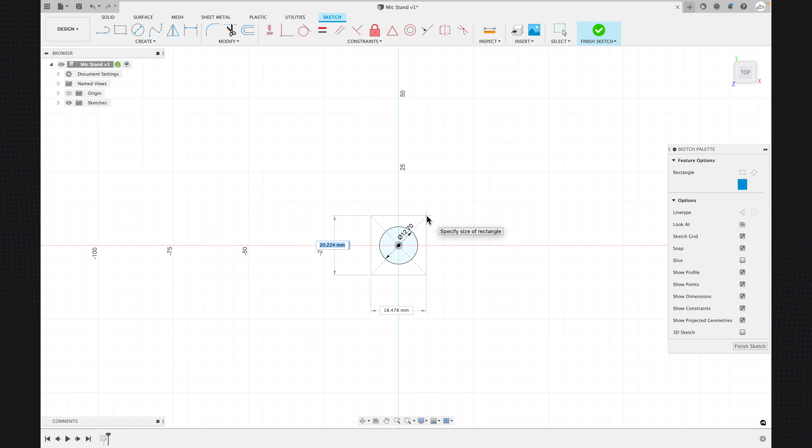So then I brought all the measurements into Fusion. I originally put the true measurements in, and then I did an additional sketch around those measurements to accommodate for tolerances so that everything would fit okay with 3D printing.

Then I added the slot portion so that you could slide the microphone into position. You might notice that I go back into the sketches a few times to make adjustments. That's just my way of going through different variations.

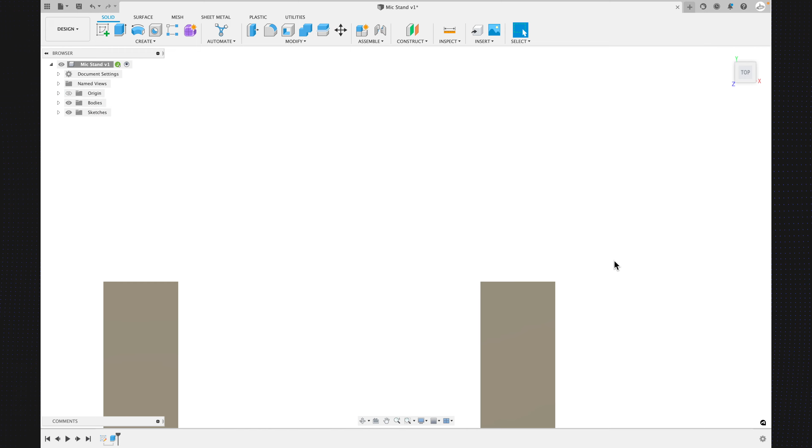I don't do much hand sketching. I think that Fusion does a lot better job of drawing perfect circles than I can. So that's just my process.

Then I do an extrusion here from an offset to make the slot. I made the slot about 2 millimeters so that the microphone would fit pretty easily, and then I could just tighten it down with that threaded part. And this is what the slot looked like when I got done with it.

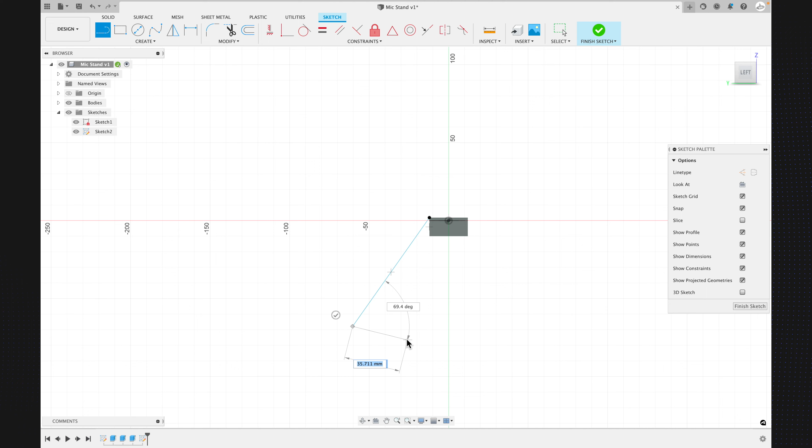So this is where I started working on the legs. I didn't do any measurements for these. I just tried to make it proportional the best I could and felt like this would be decent size since it is a pretty small microphone.

I actually started the profile sketch on the wrong plane, so I had to redefine the plane to make it in the right position. Then I used the mirror command for the other leg. Anytime you have a symmetrical part, I recommend using the mirror command because it saves you a ton of time modeling.

So this is the final model. I wasn't sure if it would work initially, but I thought it was at a point where I could print it off and test it out.

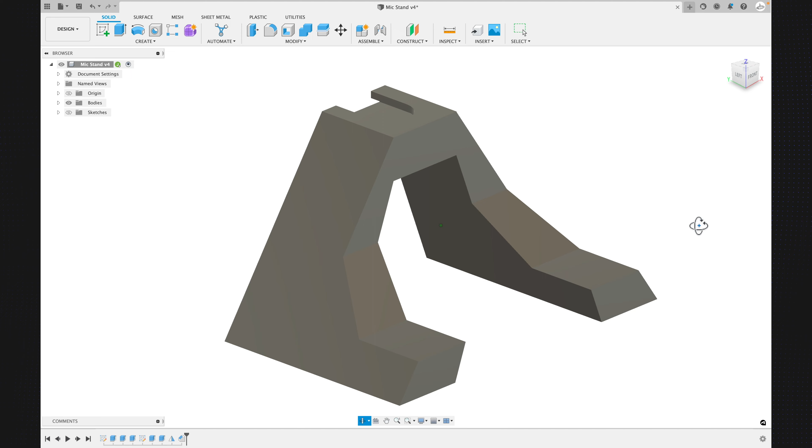I wanted to be able to print this without support, so I made the back of the mount flat so that I could lay it against the print bed. I think this is where some people make mistakes when designing for 3D printing. In my opinion, it's better to have a more simplistic design that prints well than to have a more complicated design that's harder to print or that requires supports.

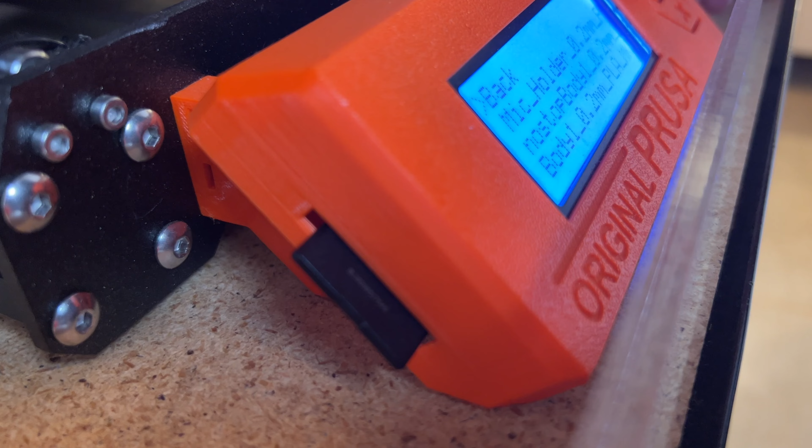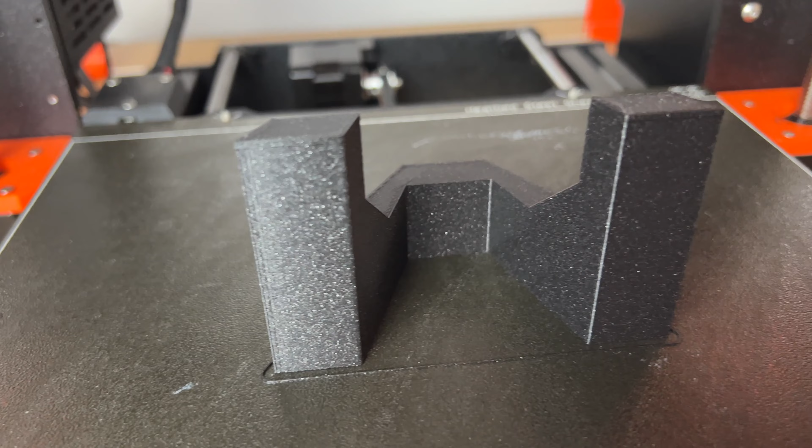I used my old faithful Prusa Mark III for this print. This printer with some Galaxy Black PLA is hard to beat when it comes to the quality of the print that you can get with the combo. The print turned out great with no notable issues, so this will be more than adequate as a functional part.

Now for the moment of truth, does it fit? Here's some ASMR for you. Fits like a glove. Now just tighten it down and do an amateur torture test.

I always hold my breath a little when I reverse engineer something to fit an existing part, but the time and effort is definitely worth it when an idea works out like you hoped it would. There's definitely something addicting about the sense of accomplishment that you feel when you create something of your own.

I'll be using this in my videos going forward, so even if you don't see it in the frame, just know that this is how I'm getting that crispy audio on my monotone, deep voice. Thank you.